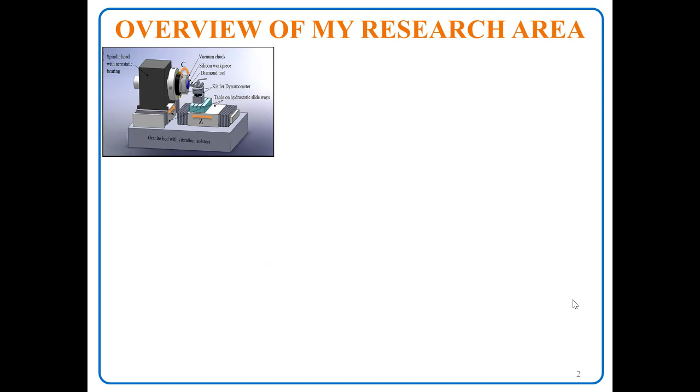Even though I'm giving this lecture on robotics today, my research area, as the coordinator mentioned, is different—this is my research area that I did in my PhD, which is single point diamond turning. Single point diamond turning is basically based on a lathe machine that we generally study in workshops, but generally at a macro level. We turn the workpiece at a macro level, like millimeter or centimeter range, removing material to get the required workpiece, like nuts and bolts or any required shaft.

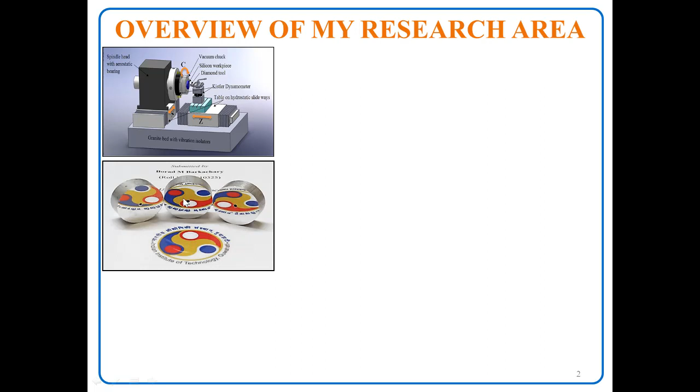Apart from single point diamond turning, I used to do numerical simulations of these processes, like turning process, nano indentation process, or plunge cutting. Basically it's a taper turning, so the tool will have linear motion with increasing depth of cut. Generally in turning process, or face turning process, we have constant depth of cut, but in case of taper turning, in the diamond process, we have increasing depth of cut, so from zero thickness to some depth we'll be cutting.

Why do we do these things? Because apart from ductile material, we also machine brittle material, like glass can be machined with this process. Like we have seen contact lenses - contact lenses can also be machined with this workpiece. That contact lens can be manufactured directly from this CNC turning machine. So that's all about my research work generally.

So let us come to our topic. I hope all of you know at least a little bit about robotics. So I can show you some images that will give you the idea, that you might have seen already.

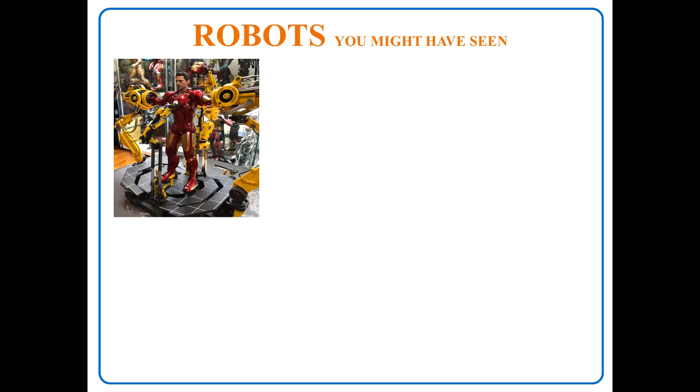There's a wide range of robots used in military or industries, where most are used to manufacture products. Like in automobiles, you can see the manufacturing of the car. All the processes are done by robots - that robots you can see here, yellow color, right?

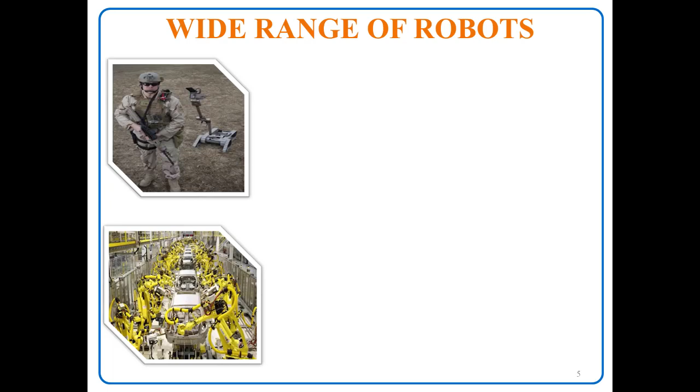In the defense sector also, we can use robots to check mines on the ground, or you can use drones to check enemy areas. Robots can be as small as a coin, or as big as a home or house.

Mostly robots are used in industries, then space exploration - nowadays space stations are using robots, because sending a human being to explore the planet is very dangerous and risky. So robots are used to explore, send information, images, or samples. They can analyze themselves inside the robot, and then send information on whether water is contained in the space or that planet or not. They can give all the information.

Then in the healthcare sector also, robots have become immersed - automatic surgery of the patient can be done by robot itself, because in some cases very complicated and precise surgery needs robots, since human hands can shake during the operation. Because of that, in some cases like precise operation or surgery, people are using these robots.

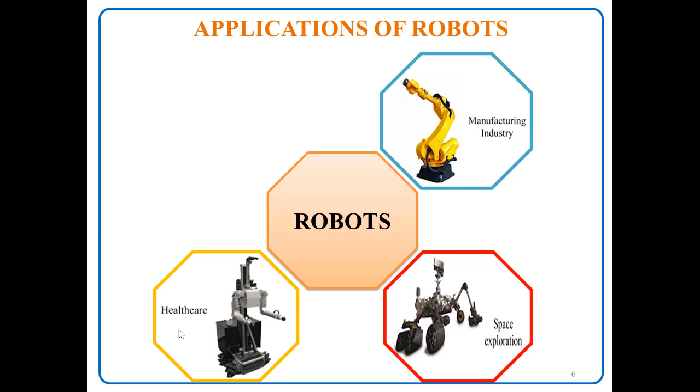Remote operations can also be possible because of healthcare robots. The doctor may be in some other place, and the patient will be in some other place. In that case you have robots which can be controlled remotely by that particular doctor to operate on the patient.

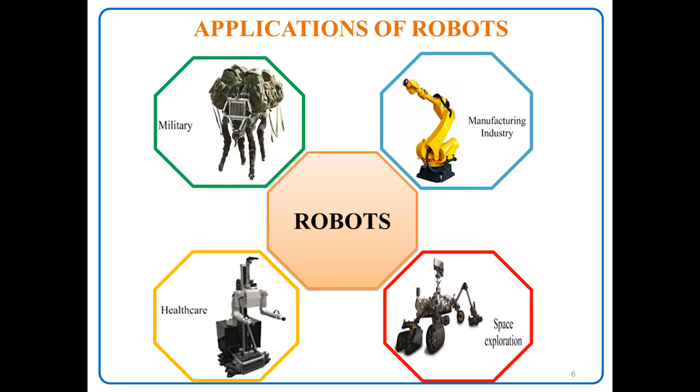Then, as I mentioned, these military robots are mostly used to carry heavy weapons to hilly areas, or disposal of bombs in mines kept on the ground. Likewise, you can use different applications of robots in the military or defense sector also.

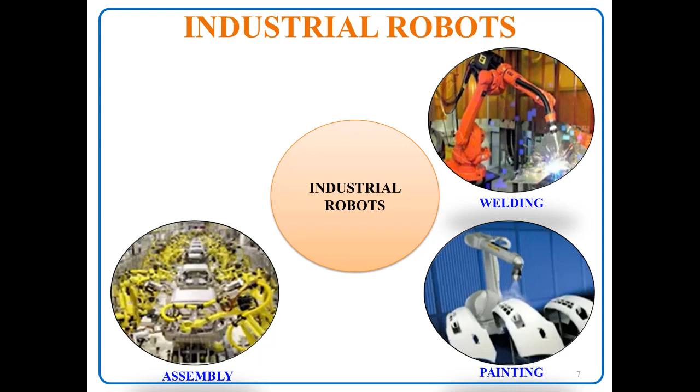If I have to mention industrial robots, we have so many applications - like welding, we generally use them, then painting of components automatically, then assembling - tightening of nuts and bolts, welding, and bringing components and placing them in the particular position. All these are done by assembly robots.

Then testing, this also needs robots. After manufacturing all the components, they have to undergo testing to check whether it is functioning correctly or not - that we have to do by these testing robots.

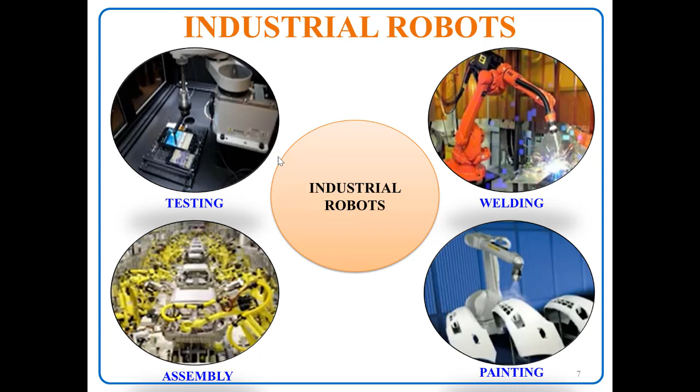Then packaging is also there in industries like food processing industries - mostly robots are used for packaging. They have to continuously count the packages, put them in a separate box, and seal it. All these are done automatically by the robots.

So these are the list you can have - like manipulation, assembly, spray painting and coating, arc welding, spot welding. All these have so many applications in industries. These are endless - if you want to talk, it will be endless applications you can find.

Remote applications include undersea exploration. Undersea, what is the depth, and if some ships are drowned inside the sea, then by using robots they can search for survivors also. Likewise, you can do these remote applications.

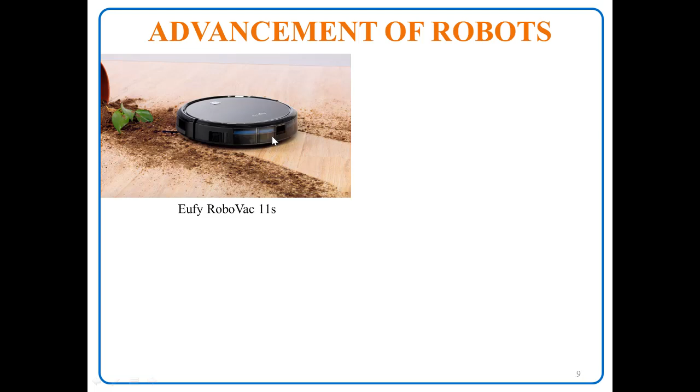Then these are some other advanced applications of robots. Nowadays people are using them for the easiness of life. Most people are using this kind of robot to clean the floor, instead of having some kind of labor.

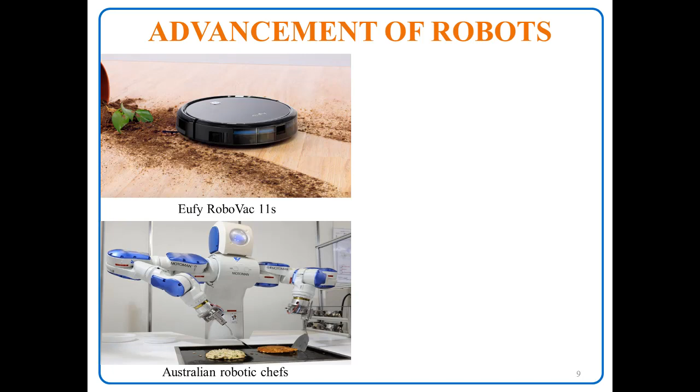Then you have cooking robots also. You just have to put in the menu, then the robot will cook for you, delicious food. Then you have waiters in the restaurants. Nowadays in India also you can find in some restaurants that robots are serving as waiters.

They can get information, visual information from the surroundings, like they can identify a person. Then they can have a conversation with someone. If you ask some question, they can reply based on the artificial intelligence stored inside this processor, inside the head.

So this is the development stage of the robots.

So this is the industrial robots in operation worldwide, that is all data basically from 2017 to 2020. That is the forecast, basically how these robots can be used in industries. It has been predicted that around 3 million robots will be in place in industries by 2020 worldwide, where automation is required.

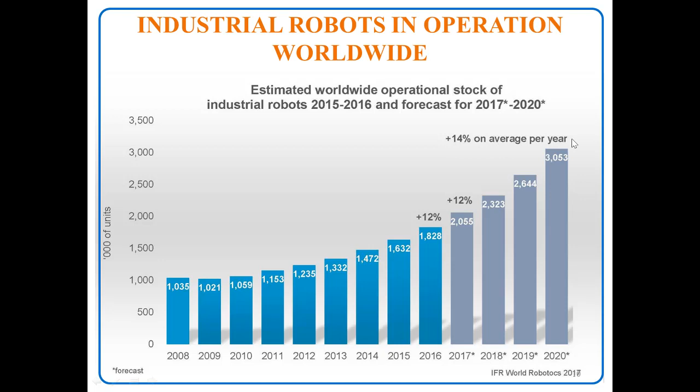So all of what I have told you now is what robots are and their different applications. So the question may be, what is a robot now? It is an electromechanical device with multiple degrees of freedom that is programmable to accomplish a variety of tasks. We have seen some machines, right?

You may have done some turning operation by lathe machine, or you might be using a washing machine. So these are some kind of machines. They also perform the work that you are assigning to the machine. You are setting the washing machine to wash the clothes. So that can also be a robot.

So what you can say about the robot is that it is a combination of many machines that is reprogrammable, and it can perform multitasking. That is the basic difference between machine and robot. Both are almost the same if you look into the working of robot and machine. In a robot also you're assigning some task and the robot will perform that task.

In a machine also, like a washing machine or lathe machine, or a higher version of the lathe machine which is the CNC machine, we give some CNC code and the CNC machine will perform the turning operation whatever you have given, and it will give you the required geometry. But the difference in a robot is that it can be reprogrammed and it can perform different operations, not only turning like the lathe machine, or only washing clothes like the washing machine. In robots they can perform multitasking. So that is the basic difference between robots and machines.

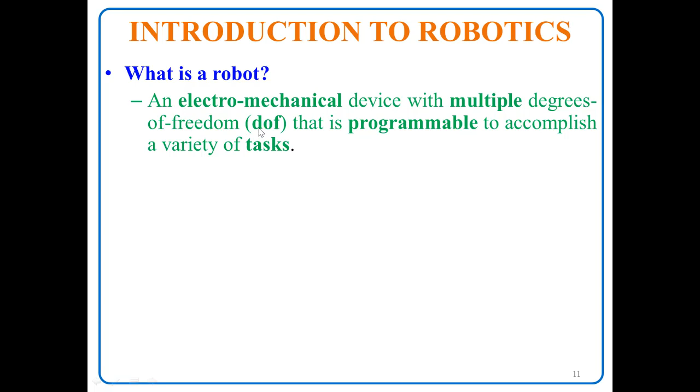So you can have multiple degrees of freedom also, that is the thing about robots. They have multiple degrees of freedom, meaning they can move their tool or end effector in different directions to get the work done. We'll see what is meant by multi degree of freedom in the coming slides, including how they can perform different tasks.

So these are some of the basic definitions of robots, given by the Robot Institute of America and ISO, who have defined robots. In basic words, robots can perform multitasking, and they can be reprogrammed to perform different tasks. These are some of the definitions to be discussed.

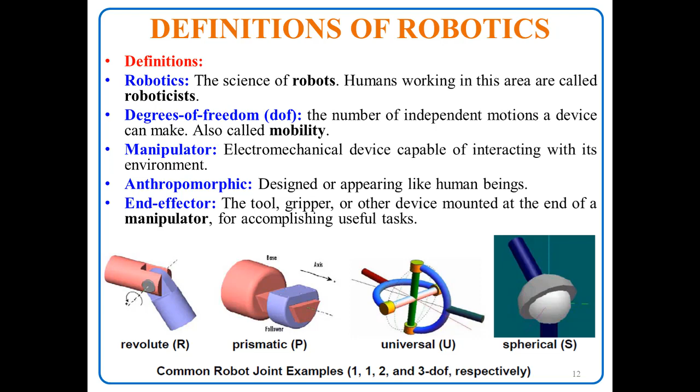If you're taking the class of robotics, this will be helpful for you. Since this is a webinar, I think this part is not required right now. All these things have to be understood when you are researching or trying to make some kind of robots, so these definitions or terms have to be known to you. Since we're discussing robotics, their wide applications, and the futuristic aspects, I think we can skip this one.

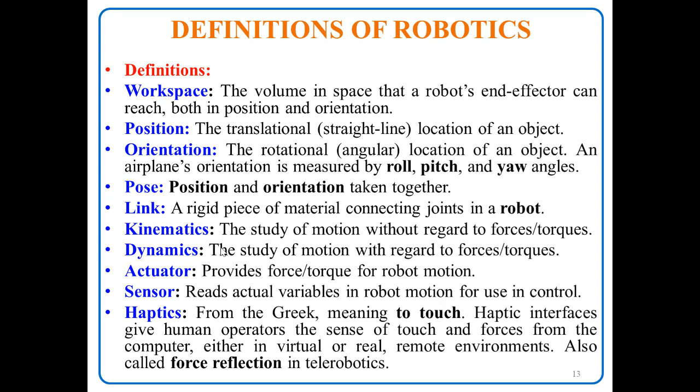Then we have to specify the robots. Suppose we are trying to build robots, or purchase robots for some of our work - we should know what specifications to give to the manufacturer, or what specifications to consider when building the robots. So we have major axis, minor axis, redundancy, reaching around obstacles, and avoiding undesirable configurations. These are the things you have to take into consideration.

If you have an object here, then whether this robot can reach this object or not - or if you have a position, like suppose you have a workpiece here, you have to sense the position. Suppose you have an object here, you have to pick this object and displace it to somewhere else, like pick and place robots. Then you have to check this major axis, minor axis, and redundancy, like reaching around obstacles. Suppose you have some kind of obstacle or barrier - whether it can reach this particular object or not. All this criteria you have to check.

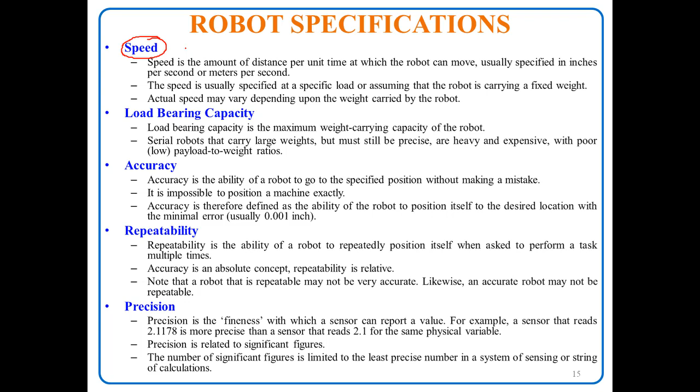Apart from that, you have speed. Speed is also a criterion that has to be there in robots - how fast they can perform the task. The speed also defines the manufacturing time, which is called the lead time of the product. The objective of the industry is to complete the task in less time so it can catch the market. So speed also defines the specification of the robot.

So these are the motivations for why we need to go for robots. In some cases it may be dangerous, like space exploration as I mentioned, then chemical spill cleanup processes in industries where very dangerous chemicals are produced for drug preparation, or other food products.

In that also we use some kind of chemicals. So if those chemicals are hazardous to the human operator, then you have to replace that operator with robots. Then disarming or disposal of bombs or mines, that will be the defense area where you have to use this kind of robots.

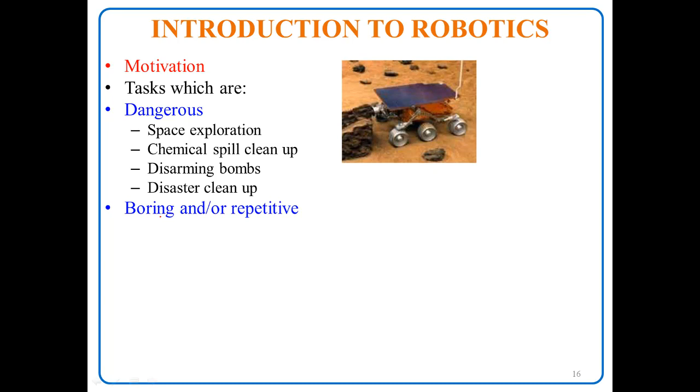Then disaster cleanup, there also you can use some kind of robots. Then boring and repetitive work, as I mentioned in welding car frames, part pick and place - in food processing industries, you have to pick and place objects like packages, put them in the box and then seal the package. All these processes are repetitive and boring, so the human operator finds this work boring, and because of that, some mistakes may happen in the process. Because of which we generally use robots.

Then, as I mentioned, high precision and high speed work - in some cases human operators may not be useful, like surgery, or precision machining, we cannot use human operators. If I talk about CNC machines, ultra precision machines, or lapping machines or honing process, these are very precise operations. If human operators are performing the process manually, then the precision you require, like surface finish and surface tolerances, may not be achieved.

This term robot has been derived from 'robota', which means work in the Slavic language. These robots come from an artificial human-like creature built for being inexpensive workers in a theater play. That word was given by this play - this theater play was there to mean this work, robota, given in the year 1920 by Karel Capek.

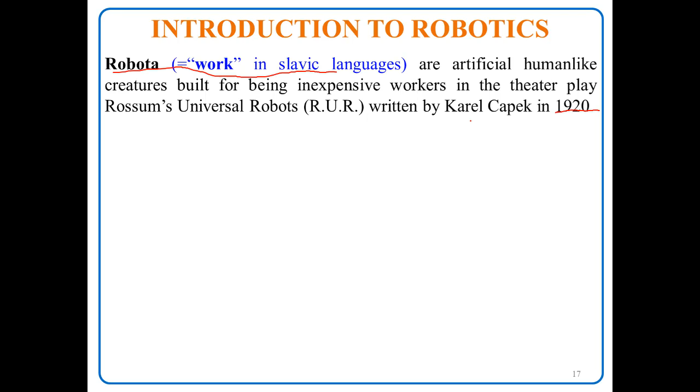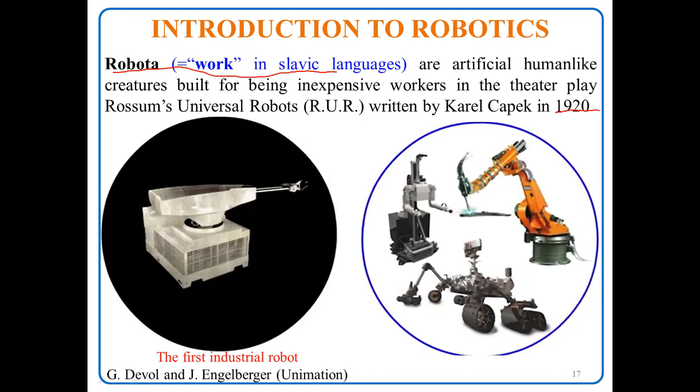This is the first robot that was manufactured by Unimation - this is the first industrial robot. Then there is a long evolution. We have seen some of these robots in that evolution, recently, in medical, space, and industries.

And these are some of the laws that we generally teach in class, that we have to know. So whenever you're designing robots or making robots, these terms have to be satisfied, otherwise your robots will not be accepted for the application.

The first and foremost of these laws of robotics is that it should not harm the human being - that is the meaning of this law. Whatever robots you design or manufacture, that robot should not harm humanity. Also, in the second law, whatever instruction is given by the operator, the robot should accomplish that task. But in that task, if the operator has given instruction to harm some kind of human being, then that violates the first law. So even though the operator has given instruction to harm some person or human being, this should not violate the first term, that it should not harm the human being. That has to be taken care of when you are designing robots.

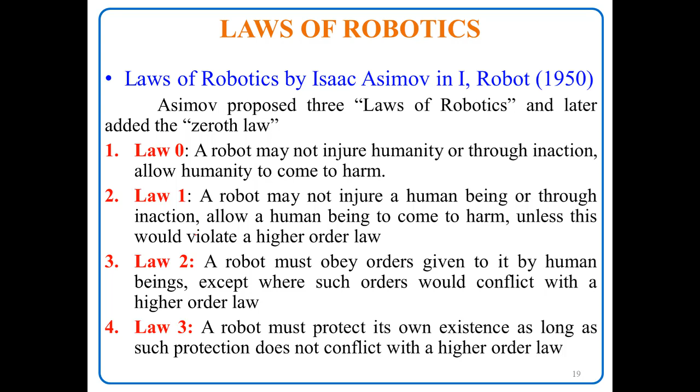Then these things are to be known whenever you are discussing robots - these things have to be discussed, because this is how robots are functioning in the task, with these kinds of components. Basically, you can resemble this robot as a human shoulder, arm, or human hand. So this is basically the waist, and you have the shoulder, then arm, then this is the wrist. Likewise, you have the base - this will be the base.

This will be fixed in some cases, and in some cases, if you have to perform some other task like moving the robots, then you have some kind of wheels to move the robot from one place to another. But basically it will be fixed. In the assembly of automobile sector, like in assembly or painting operations, these robots will be fixed.

They can move these joints. So I think you have studied some things in machines and mechanisms about linkages, arms and joints, right? So all these mechanisms come into picture about the working of the robot.

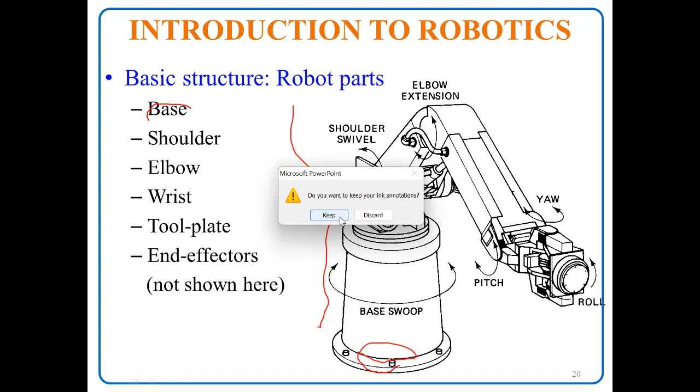So this is the base we have in the robot. In that base we can rotate along this vertical axis. The robot can rotate, so you have rotating motors and a controller that will rotate the base in this axis. Then you have another motor here that will control the rotation of this...

Basically this will be a shoulder. This is the shoulder and this is the part of the arm, so the shoulder will rotate. Then you have the elbow here, it also has one controller that will rotate it clockwise or anti-clockwise depending on the requirement. Then this is the wrist, where it can rotate. So in the wrist, whatever we have in the human arm, that also has a similar degree of freedom or rotational motion that can be performed.

So these motions are given the names pitch, yaw and roll. We'll see how we can find out this kind of degree of freedom or motion. Then this part is what we call an end effector, where we fix the tool for whatever task the robot has to perform. If it is a welding operation, we'll fix the welding tools here. Then if it is a painting robot, we'll fix the painting tools or painting device here.

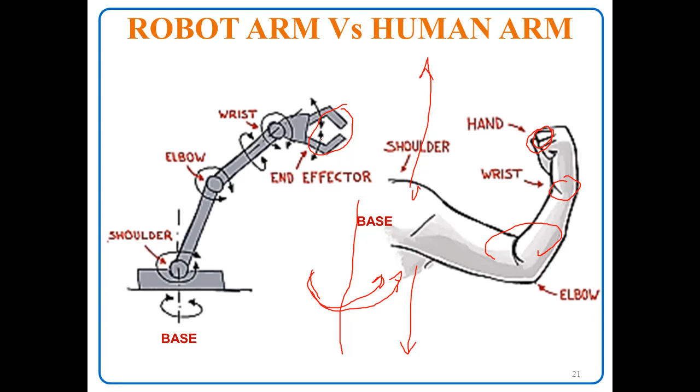Based on the applications, you can classify the robots like Cartesian coordinate, cylindrical coordinate, polar coordinate, jointed arm configuration. Then depending on the drive systems, you can differentiate between pneumatic or power source, that is the driving source of the robots. Mostly we use hydraulics and pneumatics for easy application. Then electrical can also be used, but they have different advantages and disadvantages because of the accuracy and power required. Hydraulic robots have more power compared to electrical machines, but the accuracy of hydraulic machines is less compared to electrical robots.

Then depending on the work that the robot can perform, like limited sequence robot, point-to-point control - drilling operations are an example of point-to-point. The robot can perform point-to-point, but it cannot be continuous, it cannot perform continuous operation. Like if you have to perform a welding operation, point-to-point control cannot work for welding, because welding should be done in a continuous manner.

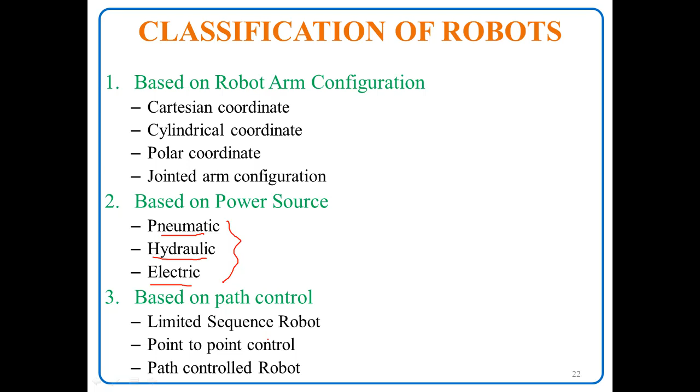In case of spot welding, it can perform using point-to-point control robots.

In case of cylindrical robots, one rotational motion is there and the others are linear motion. Similarly, in spherical robots we have two rotational degrees of freedom and one linear.

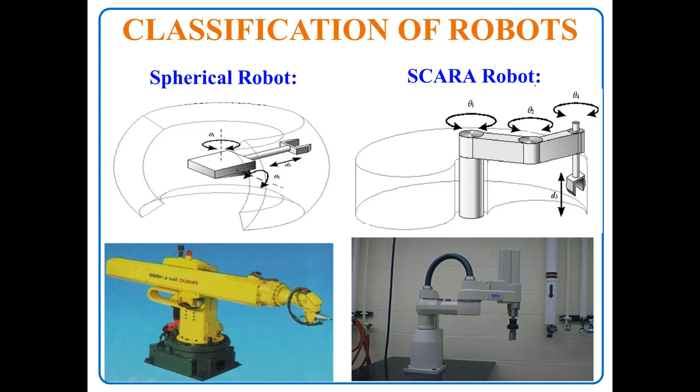Side by side you can find the actual robots that have this kind of degree of freedom. In SCARA robots you have three rotational motions, and the arm can give some kind of linear motion. So basically SCARA robots generally have three rotational degrees of freedom.

Then we find articulated robots, mostly known as fixed robots. The base is fixed in some places, and they can move the arms in a surrounding area. The area in which this end part can move is called the work envelope, that given volume or region. Only in that region can the robot perform the task. Apart from that it cannot perform outside this region, because the end point of the robot cannot reach beyond it. That is called the articulated robot.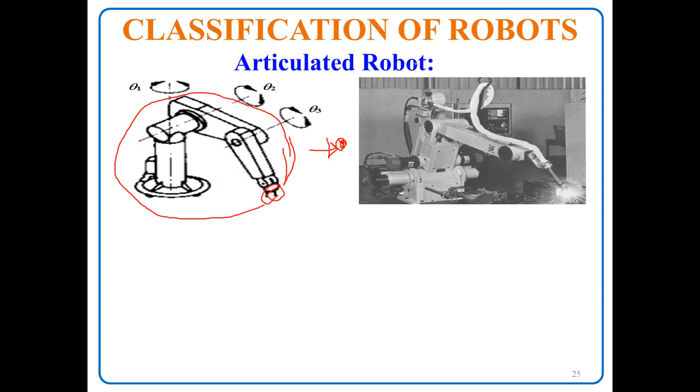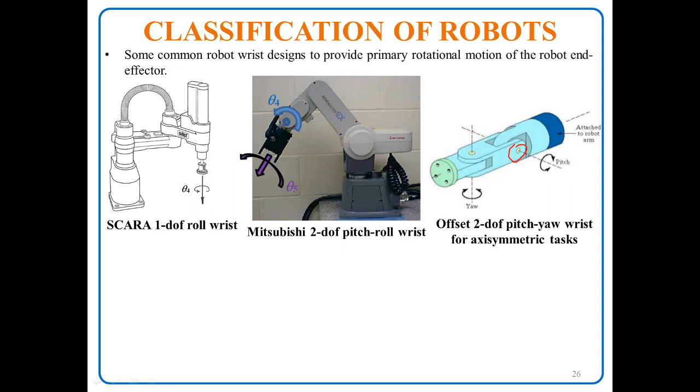Apart from this classification, we can also classify robots based on degree of freedom. This is only one degree of freedom, then two degrees of freedom to the end effector, three degrees of freedom. Then we have two degrees of freedom for the pitch-yaw wrist, where it can rotate at this axis and that axis. Apart from this they cannot rotate anywhere, so because of that it is two degrees of freedom.

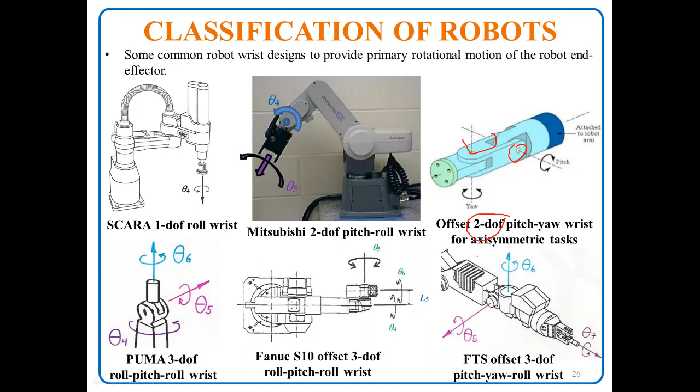Then three degrees of freedom can also be there. Depending on the type of robot, you can have up to six degrees of freedom or more. So minimum is one degree of freedom, and then you can have multiple degrees of freedom.

You can see here this particular robot. This is the waist, that is the base, and it can rotate there, so this is the first degree of freedom. Then this is the shoulder, which can rotate at this joint. This is the teach pendant, which the operator can use to control and give instructions to the motor situated at this joint, to move the robot from one position to another.

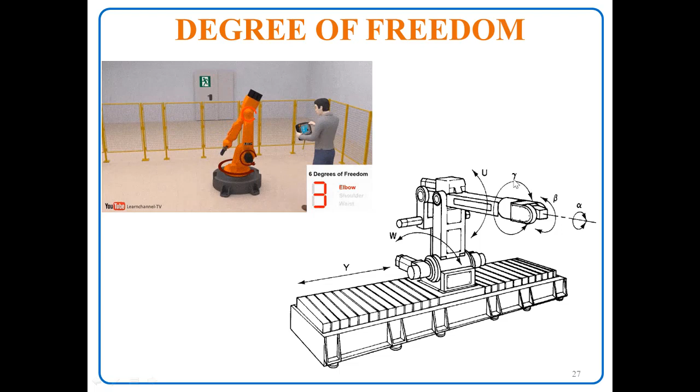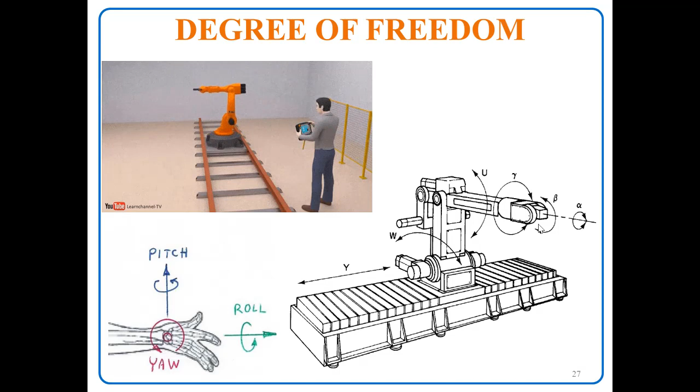So basically you can find three degrees of freedom: the waist, shoulder, and elbow, and from the wrist you can have three more degrees of freedom, which we'll discuss later. This one is the wrist, so you can have yaw, pitch, and roll, which basically resembles the human arm. Likewise you have yaw, pitch, and roll. We'll see how we can have this kind of movement.

This one is the arm of the robot, and here you can see the end effector. These things are already explained. So here we have the pitch. Yaw is when you're moving the arm from one side to the left or right, that is called yaw. Pitch is when you move the arm up and down, and roll means you rotate it some degree, that is the rolling of the arm.

Likewise, you can have 3 degrees of freedom on the wrist of the human arm. So altogether, you can have 6 degrees of freedom. And if you move the robot in this kind of railing, then you can have another degree of freedom, that is 7 degrees of freedom.

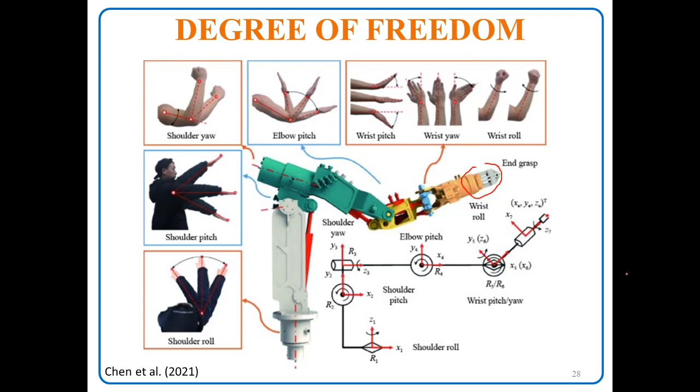Now if you fix the tool, that is the drilling tool, and that drilling tool can also rotate, then you have added another degree of freedom to the robot. Likewise, it can add or reduce the degree of freedom depending on your requirement.

In the previous slide, I mentioned the work envelope or working region of the robot. Since articulated robots are fixed at their base, they cannot move from one position to another position. Only the end effector can move because of the connecting mechanism, as you might have studied in machines and mechanisms.

So you have this linkage mechanism and joint mechanism. Because of the movements of the joints and their rotation, this link will rotate, and there will be relative motion of other arms. Likewise, it can move to this region. Whatever white spot you can see, in that region only the end effector can move, depending on the degree of freedom or rotation they can perform at their joints. This white region is where the robot can perform its work.

So suppose if you place an object here, this is outside the boundary of the work envelope, so the robot cannot reach this object or perform the given task. But if you place the job here or here, they can perform the required task in that region.

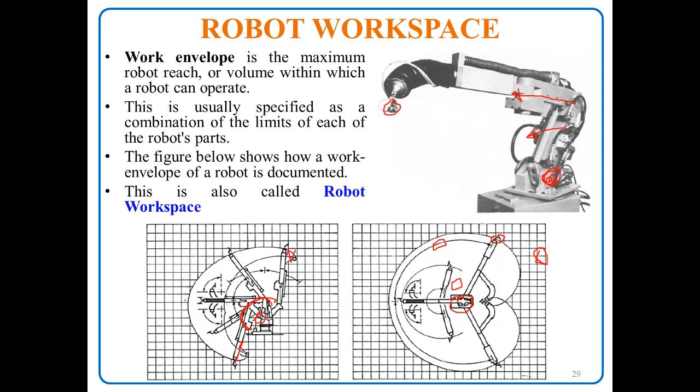Now the end effector is also useful for the robots, because only on the end effector do we attach the tool. Whatever required task has to be performed, that tool can be attached to the end effector, and then the robot can perform that particular task.

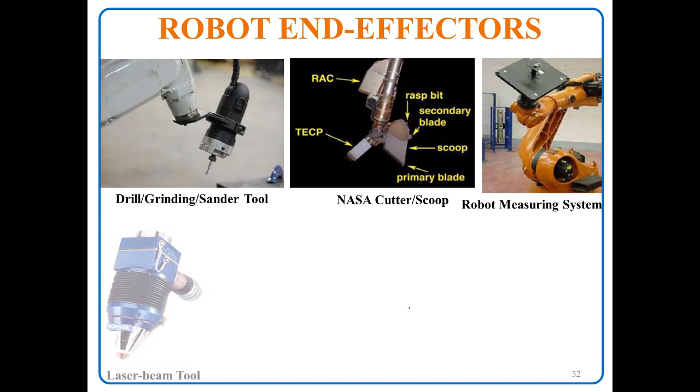So this is the tools that you can attach to the end effector of the robots to perform different tasks. This is the end effector where you can fix the tool.

So you can fix the tools, like this is a drilling operation, or it can be the grinding operation or sanding operation for finishing the part.

Then you have this NASA cutter scoop, that will be used in case of space exploration robots, where you have to get the sample from the planet's surface, like soil samples. They can test there whether water content or some kind of chemicals are present or not. They can use this kind of cutter on the arm of the robot.

Then this is the robot measuring system. They can have some kind of measuring instruments attached to this robotic arm, and then they can perform the testing operation.

Then these are the laser beam tools, like laser cutting or laser welding, or laser markings. All this can be performed by this tool, and this will be fixed on the end effector of the robot.

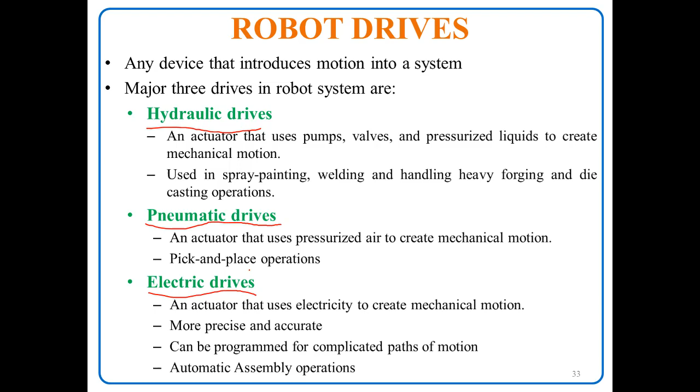Apart from that we can have some other drives also, like artificial muscles that are mostly operated using air pressure. Then piezoelectric materials can also be used - if you pass electric current, the piezoelectric material will give power, like it will deflect. Piezoelectric materials change their geometry when given electrical energy, and in the opposite way, if you change the geometry of the material, it generates electricity. That is the property of piezoelectric materials.

Then apart from that, electrical energy, which may be DC voltage or AC voltage, will control the servo motors - DC servo motors or AC servo motors - that will be in the controller part. So to drive the motors we need electric motors. If you are using servo motors, you should have electric motors, and to run the electric motors you should use electric energy.

Then if you have hydraulic cylinders or pneumatic cylinders, that energy will come from compressed liquid, compressed fluid, or compressed air. In that way you can move the different arms, to rotate the joints.

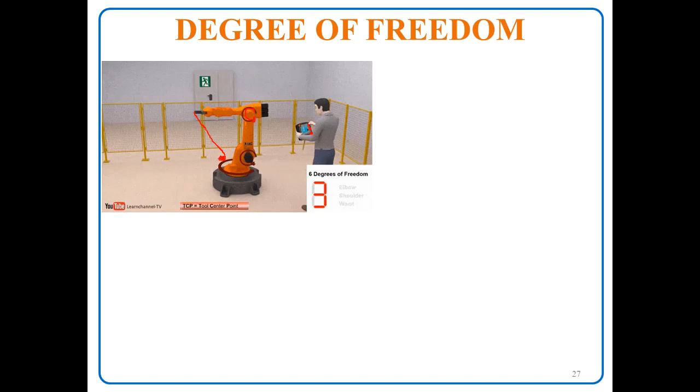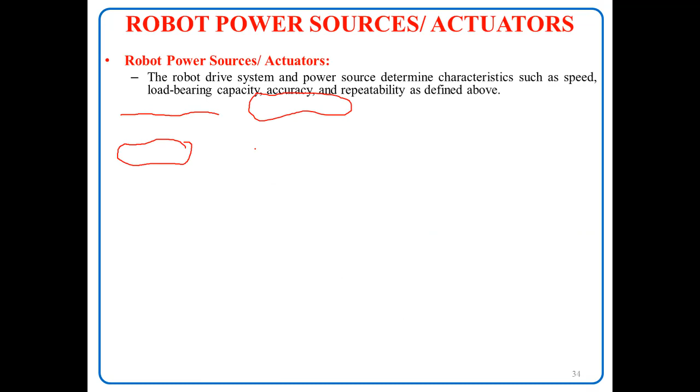So if you have to move this point to here, it will give the instruction to rotate this motor. They have different separate controllers or regulators, joysticks mostly used, so they can move these joysticks to rotate from one position to another. Likewise, you can teach the robots, and the programming will be stored in the teach pendant, and when you run these motions, it will repeat the process.

Then offline programming, that is like you have the software in the computer, so you can make the programming in the computer itself. Then you can take this program in a pen drive, and put the pen drive in this pendant or controller, whatever you have, or directly to the robot.

So basically the robot doesn't have this controlling device, they come only with a controller. Those motors will be there, or hydraulic systems, if you have hydraulic motor then hydraulic drives will also be there. The controlling or processing device will be separately there, so you have to put the pen drive in this device and run the code.

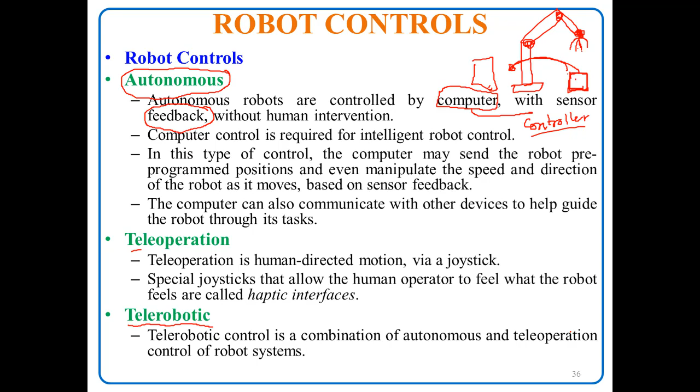Lastly, telerobotics is basically the combination of autonomous and teleoperation. The robots can take decisions autonomously, but if you have to give some more instruction precisely, or some random decision has to be made, like if obstacles are coming, the robot is picking and placing the object by its own decision. The computer is taking the decision, but if some obstacle suddenly comes, instruction has to be given to avoid the obstacle, then teleoperation can be added to this telerobotics. So simultaneously, this functioning of the robots will work.

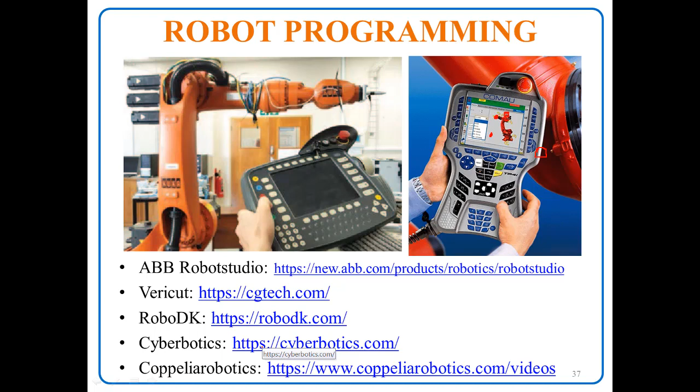They have different kinds of robots, and then you can give some kind of coding or programming there itself in the software. Then you can see the visualization of how the robot performs the work. So just for your information, I have listed some of the sites. More softwares will also be available, robot to robot, as the manufacturer provides their own software.

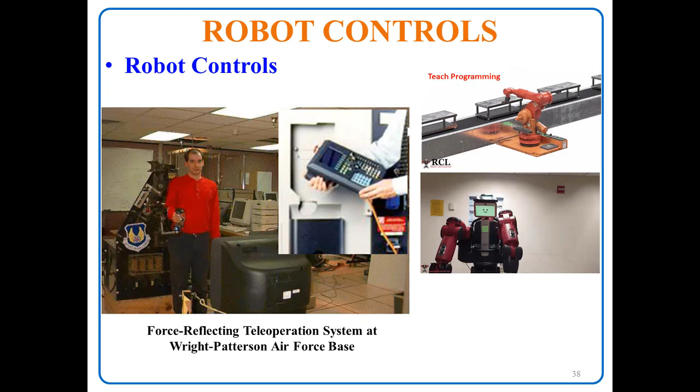Then here it's the lead-through programming. The operator is moving the robot's arms from one position to another position. Now the robot has stored this information and it is repeating the same task. Whatever movement is there in the robotic arm or the parts of the robot, that is recorded by the computer continuously. That recording is again played back, and if you playback the motion, it will perform the same task.

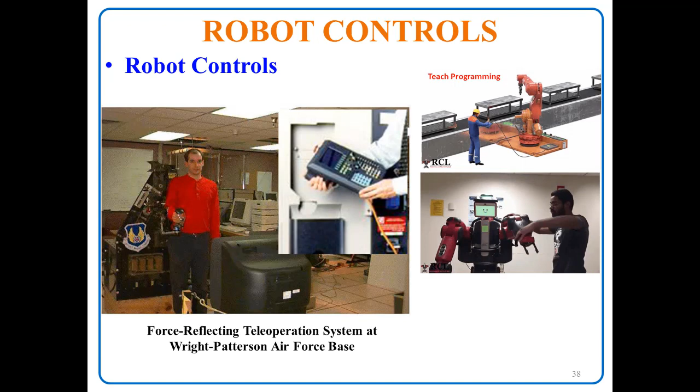So in that way the robot will learn the things and repeat the process. For that you need to have very good image processing, so the robot should have information about these objects. Suppose a person has performed the task, grabbing the objects one by one.

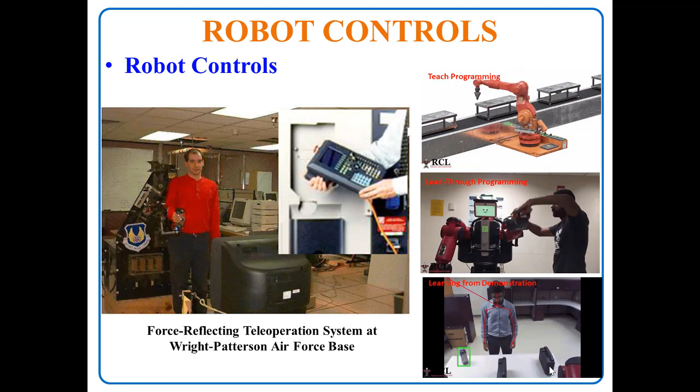Now when you ask the robot to perform the same task and some other object has been placed here, the robot needs information that the object has been sensed. So image processing should identify the object first, and then it will perform the task.

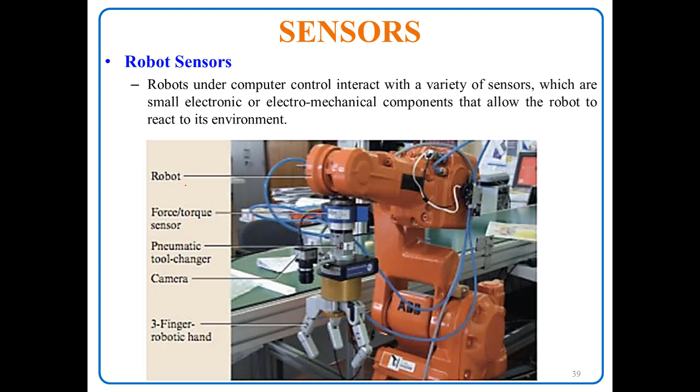To perform the task smoothly and accurately, you should have a good sensor. The sensor is the backbone of the robot, because the controller gets information from it to decide the task. The processing unit gets information from the sensor and sends it to the controller. If the information is not correctly going to the processing unit, the functioning of the robot will be useless, or there will be a mismatch of the task. So you should have a good sensor for good information processing.

Robot sensors are like the sensory organs in humans. All information from the surrounding is sent to the processing unit, and it sends the signal to the controller. Like when we touch a hot body with our hand, the skin has the sensor that gets the information that you've touched the hot body, so you should move the arm away from it.

The sensor from the skin sends the signal through our nerves to the brain, and the brain processes it. The brain gets the information that the hand is on the hot body, and if you don't move the arm, it will burn, so the brain decides that the arm has to be moved.

The brain sends a signal to the nerves, and the nerves move the arm from one place to another. The elbow and arm joints are there, and the nerve system gets excited and gives some force to move the arm from that place.

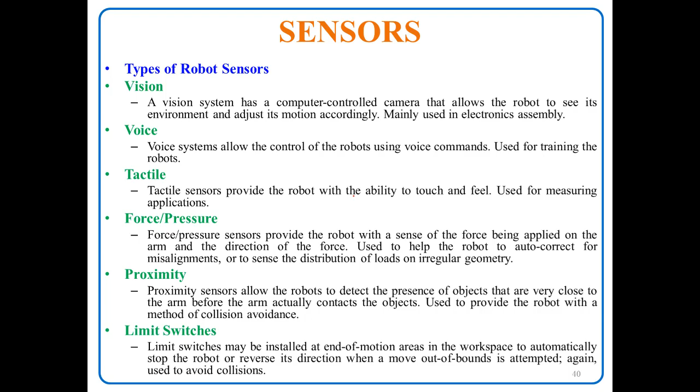So these are some of the sensors you can use for different applications depending on your requirement. These are not to be discussed right now because I've already taken about 1.5 hours.

Just to give an idea about the application of robots, I'm taking the example of the application of robots in agriculture. In agriculture too, the application of robots is now very much used.

Because the production from cultivation of rice or any other crops is not sufficient to run the family or livelihood, using robots to increase production is now an aim of farmers also. Because of that, in many fields, like food industries also, they are using some kind of robots to increase production.

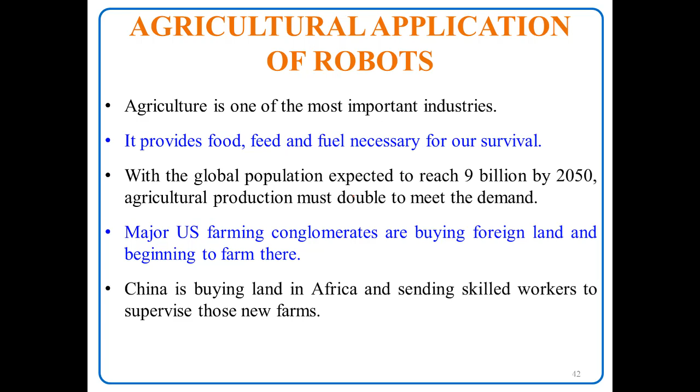In other areas, lots of applications are also there like medical, military, and industries. If you have to talk about all of them, it will be a very long discussion. So just to give you the idea how these robots are helping the agricultural field.

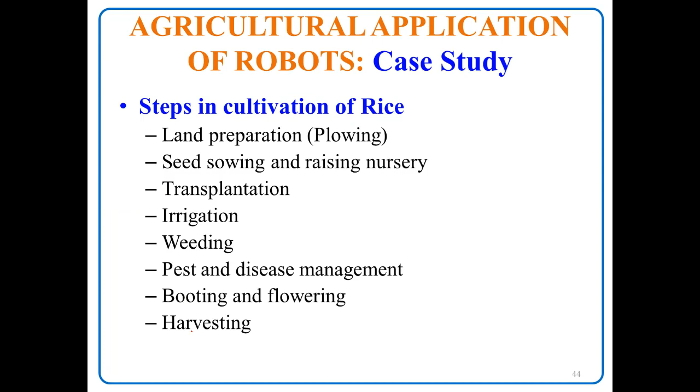If you consider the traditional cultivation of rice, you have land preparation by plowing using cows and buffaloes, then seed sowing and raising the nursery, transplantation, irrigation, weeding, pest and disease management, booting and flowering, and lastly harvesting. Then separation of the crops from the plant is also one kind of process. This time period from October to March is how the process takes.

In Assam or northeast India generally, this is the time people are starting cultivation of rice, because the rainy season has started, so we start plowing the field and then seeding. Then from 5 to 6 months that rice will be ready to harvest. But because of development of technology, throughout the year people are cultivating rice now in some areas.

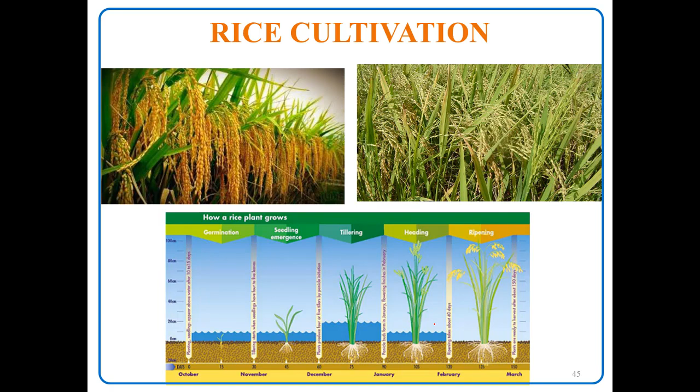This is a long process, and if you perform it manually, the labor cost will be very high. So nowadays whatever you spend for getting the rice, for labor and plantation, and whatever you get from harvesting the crop and selling on the market, that is not sufficient. You are not able to save enough money to run the family. Because of that, the application of robots is nowadays in use.

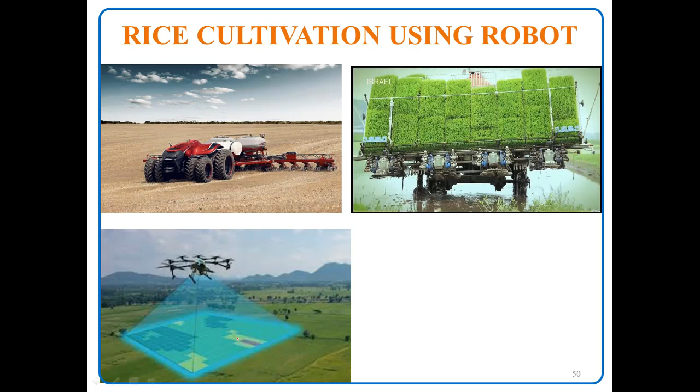Then automatic planting of rice plants. Then remote observation of the fields, to check whether some kind of disease has occurred. Image processing and drones will be used to investigate or check the field. If you find diseases on the field, then you can go for pesticides, using robots like drones and other robots for spraying. Weed control can also be performed by robots. Then harvesting of crops, directly separating crops by tractor or harvester.

So likewise these have been developed by using robots. These are some of the applications of robotics in various fields that I have discussed with you.

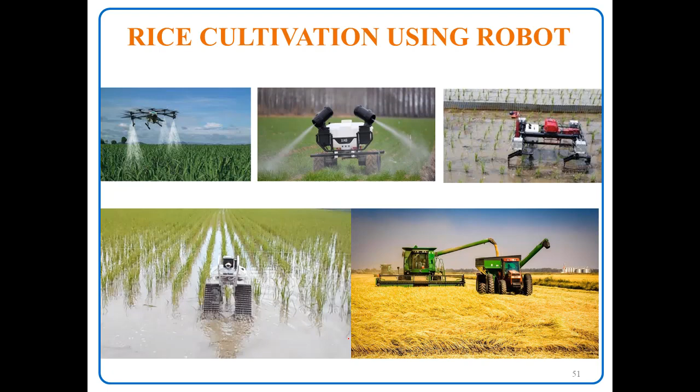I want to show you some videos that will give you a sense of development, futuristic concepts. I hope all of you have seen this kind of videos on YouTube and Facebook, similar videos used to come up, giving suggestions once you start watching on YouTube. So these are some of the conceptual robots that have been developed.

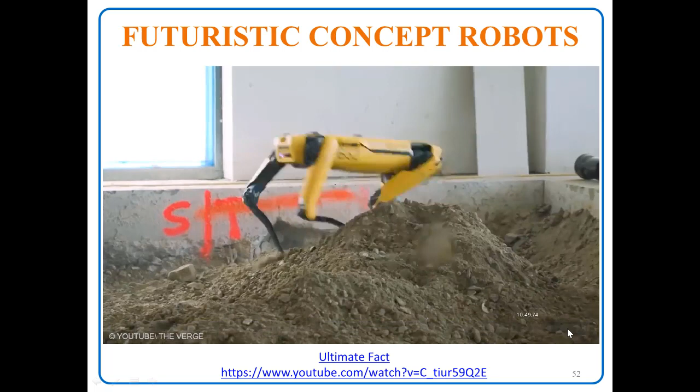So is the audio audible? Audio of the video? Okay.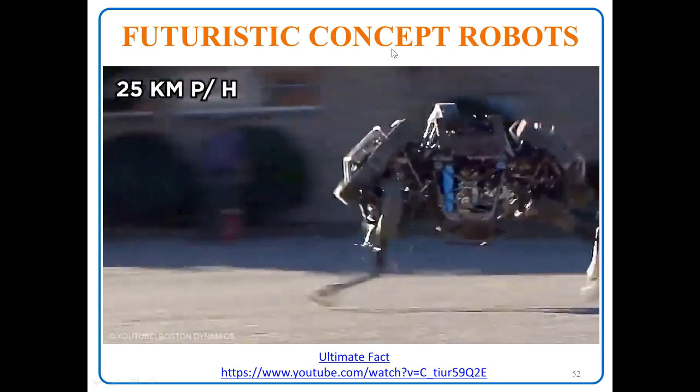So some lagging is there in the video. So let me show you the direct video. So I think it will be...

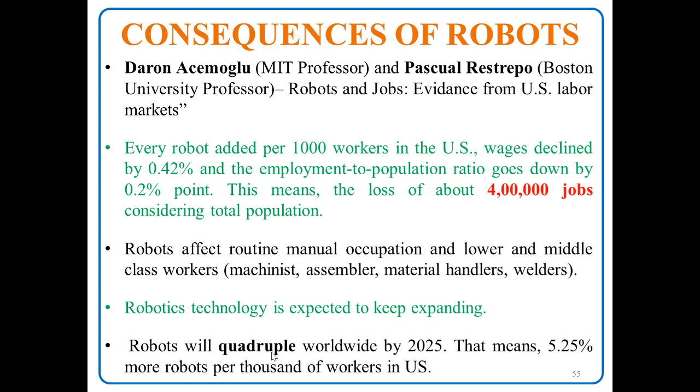And by 2025, the use of robots will quadruple, that is increase 4 times. So there is a very big chance of losing so many workers' jobs in industries. So we have to see both sides of the scenario here right now.

So on one side we have to increase productivity because most industries are very competitive nowadays to catch the market. So every minute, updation or modification of the products is coming out. There is very big competition in the industries, so they will be very keen to use robots to get the work done in a faster way.

But on the other side, if you use robots, the workers who were working for a long period of time will lose their jobs. So there should be some kind of preventive measures taken, like the persons who are working for a long time should be trained as skilled laborers. They have to improve their level of working so that they can be placed in some other place where skilled labor is required, apart from the usual repetitive work where robots can be used.

Then replacement of the workers: they have to be transported to some other places where labor workers or manual workers are required. That has to be done. Likewise, we can give preventive measures for the losing of jobs from the workers.

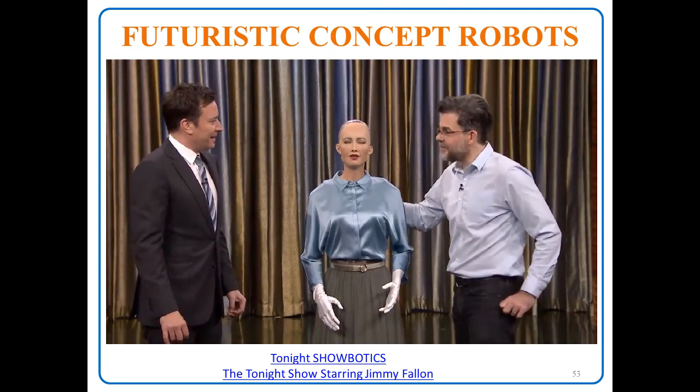So this is the Sophia robot basically. She has intelligence, artificial intelligence.

So this is the advancement of artificial robots that we have now. They can take decisions, they can converse, make conversation. That is a social robot. Basically, Sophia is a social robot. She has got citizenship in Saudi Arabia also right now.

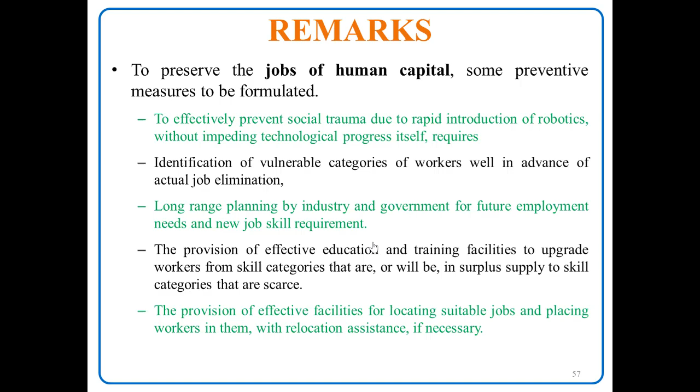So that's all about robotics. I think I've crossed the time, so sorry for that. Thank you.